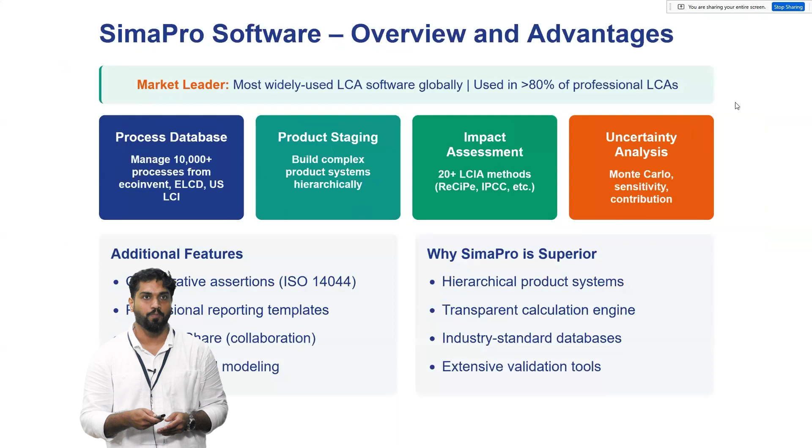You can use different other softwares also. Since we are talking about SimaPro here, these are some of the advantages you can see. Let's get started on how to do the life cycle assessment in SimaPro software, or any process.

The first thing you would have to do is to clearly sketch down or clearly define the different processes that are involved, or a flow diagram of the different processes. This is an example for life cycle assessment of a cycle.

In your project also, the first thing you might have done is to clearly write down or sketch down what are the different processes involved, divide that into different unit processes, and then add on different emissions associated to those, then the recycling process or waste disposal scenarios. This is how we start any LCA project.

Here this is an example of a cycle, life cycle assessment of a cycle, cycling for 1 lakh kilometer over a lifetime of 15 years. So this functional unit is very important in order to compare different systems. We need to make the functional unit similar.

For example, if you are talking about milk packaging, one is using carton and one is using bottle, you cannot make a comparison from different materials, but what we can do is make the functional unit comparable, like delivery of 1 liter of milk to consumers. Some of the other examples are transportation and water purification.

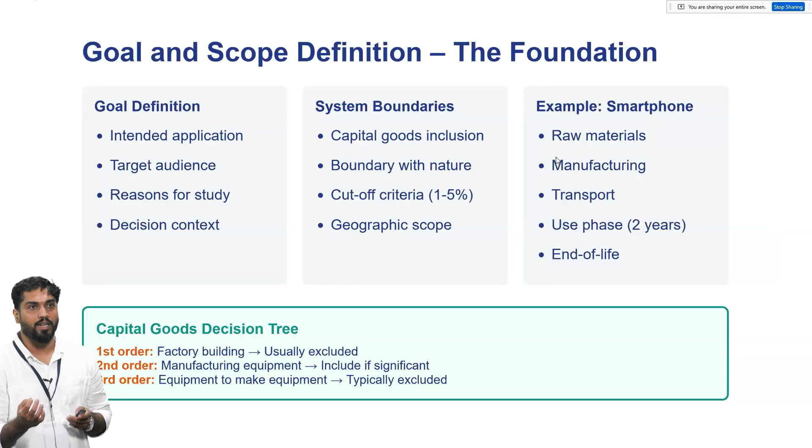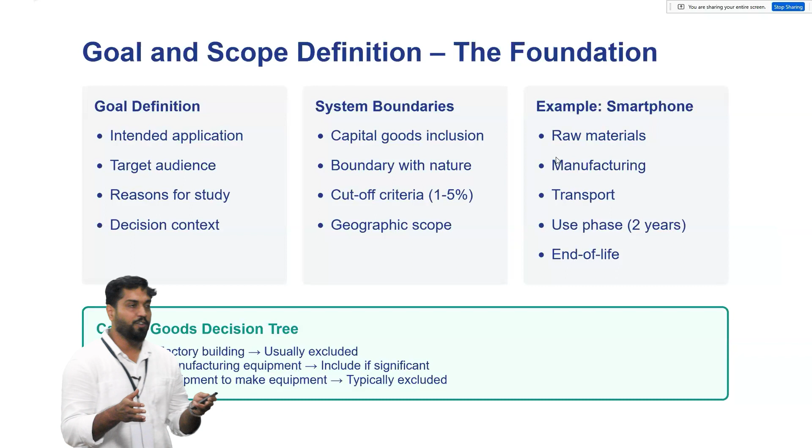These are how we should define our goal, system boundaries, etc. Goal definition should target the audience, intended application, the reasons. It should clearly define the reason why we are doing this process. And the system boundaries also, like whether we are including the capital goods or infrastructure associated to the processes. Here is an example, like for smartphone, what are the system boundaries that we have included: raw materials, manufacturing, transport, use phase, end of life.

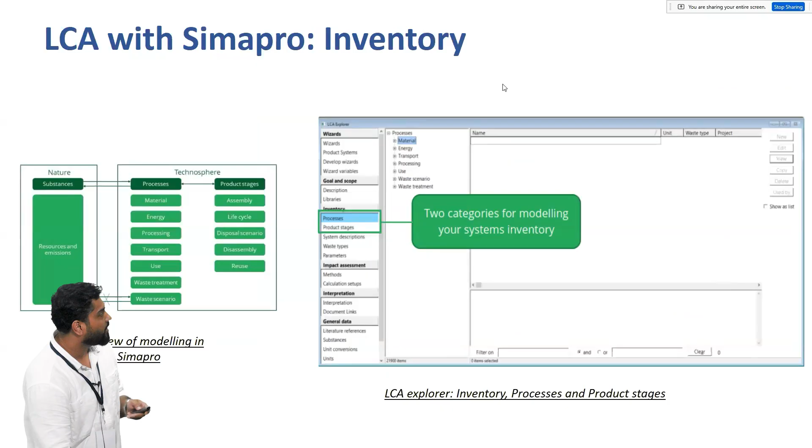This is an overview of the modeling that is used in SimaPro, like the resource and emissions from nature connected to the processes, material, energy, and different emissions associated to those in technosphere. Then in the product stage we have assembly, whole life cycle assessment, then disassembly, reuse, disposal scenarios. So this is the overview of modeling in SimaPro.

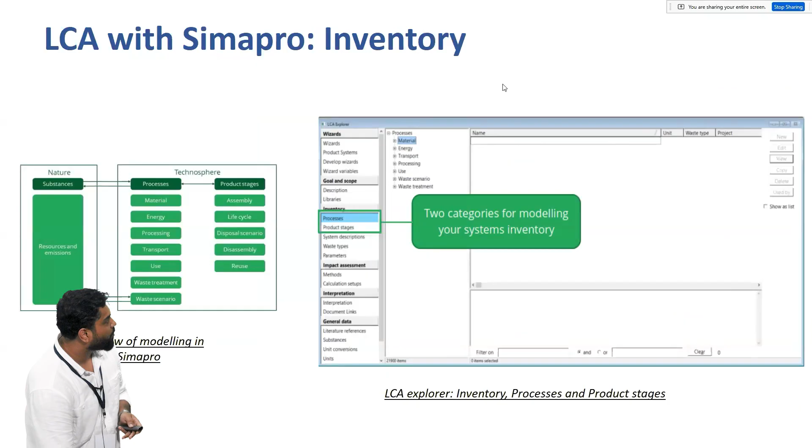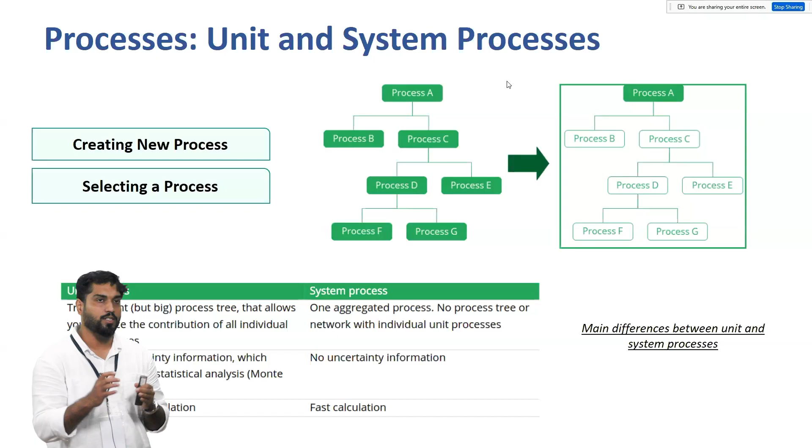Let's go to processes, unit and system processes. If you follow the database in SimaPro or any life cycle assessment software, you might have seen there are two different processes available: one is unit process and another is system process. The emissions associated to unit process are connected with the background data, while the emissions in the background data associated to system processes are provided in the same box. That is the major difference.

So when you select these processes in your project, it depends on your need and all, of course, but to make the inventory light, it is better to use the system process.

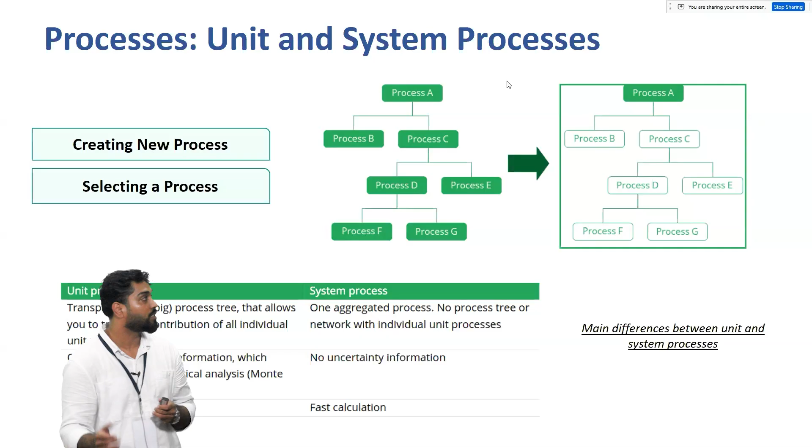Let's go to SimaPro and create one process here. In this presentation, my objective is to take you to SimaPro, the interfaces, what are the different functionalities available. We have been talking about the LCA process, then how exactly it is done in the software. So once you define all the goal definition, functional unit of the project that you intend to do, you can then start preparing different processes.

So when you come to the inventory, the first one will be processes, and as ma'am was mentioning in her previous presentation, many of these processes are already defined, because we have selected different libraries, and from previous studies or databases we have, like ecoinvent, these many processes are already defined. So if you go to any one of these processes, you can see, for example, aluminum alloy metal matrix composite and global market for aluminum alloy metal matrix composite system.

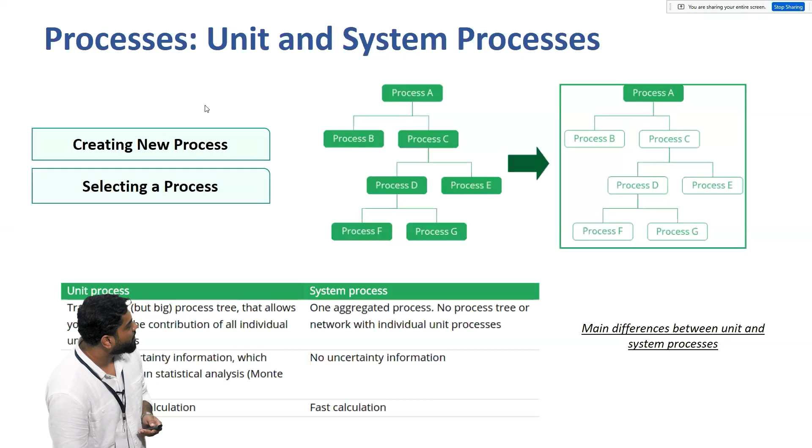Then there are two types of LCA analysis: one is consequential analysis and one is attributional. The difference is that consequential analysis is for different processes—for example, transportation is a process, so that's consequential analysis. Attributional analysis is for different products, for example the PET water bottle, etc.

For example, the water bottle, PET water bottle, etc. And another important thing to see is the allocation hierarchy.

Another important thing to see is the allocation hierarchy. Could you please repeat the difference? So consequential analysis is for different processes, and attributional LCA is for the products.

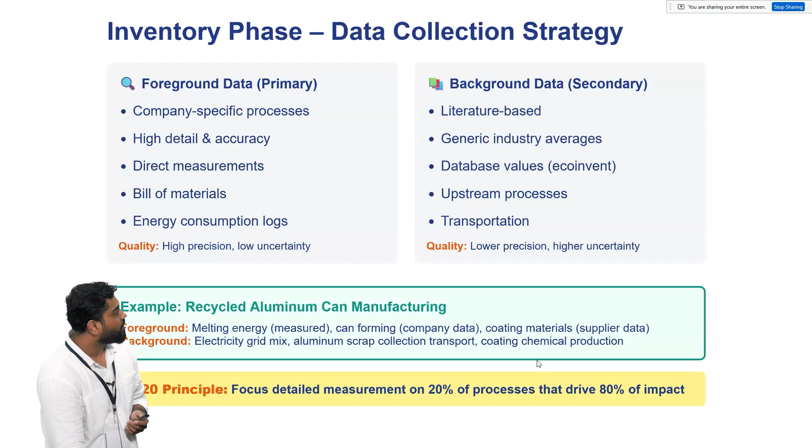The library that you just chose. Yeah, in the library there are different types. The aluminum thing that we chose, will that go in the background data, right? Because that is not our direct measurement. Which one, the previous one? This one? If you're not creating it, you said.

It depends on where you are collecting the data from. So if you are getting this data from a company itself, like in their EPD, that's foreground data. If you are picking it from literature or some library, then it becomes background data. This data may also be collected from a company, not necessarily from a library.

So once you create these processes, different processes you have created - for example, this is an example for comparing different materials used for a cycle frame. So you have created processes using different materials.

In SimaPro, for the cycle frame, now you can compare the environmental impacts associated with these different processes. There is a compare module available in SimaPro. So for example...

You can select this, and then here is the compare module. So these are the different processes that you have created newly in the SimaPro software. You can compare the environmental impact associated with these processes by clicking here, and here I have selected ReCiPe midpoint. I will come to the selection of the methods in a little while.

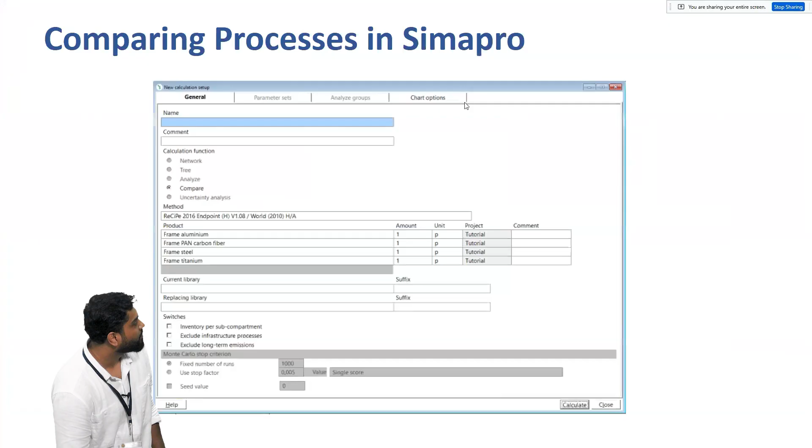So right now I selected this ReCiPe endpoint. These are different impact assessment methods that are available, and how do we make a choice of which impact assessment method should be used? Basically it is more about the deliverables, and the audience that we are delivering these impact assessments to.

For example, in a company, you will get this data - you plan for implementing an LCA study, you define all the scope definition and created the inventory, did the LCA analysis.

So if we are doing it for designers, then it should contain more eco indicators. Eco indicators are impact categories that are related to ecology, like eutrophication potential, land use, ozone depletion - those categories.

And if you are doing it for product managers, then it should contain more aggregated scores, like the impact categories. For example, it was discussed in the previous presentations that the impact categories have different units, so it cannot be compared among themselves, but it can be made comparable by dividing with normalization factors, or it can be compared to single score LCA results.

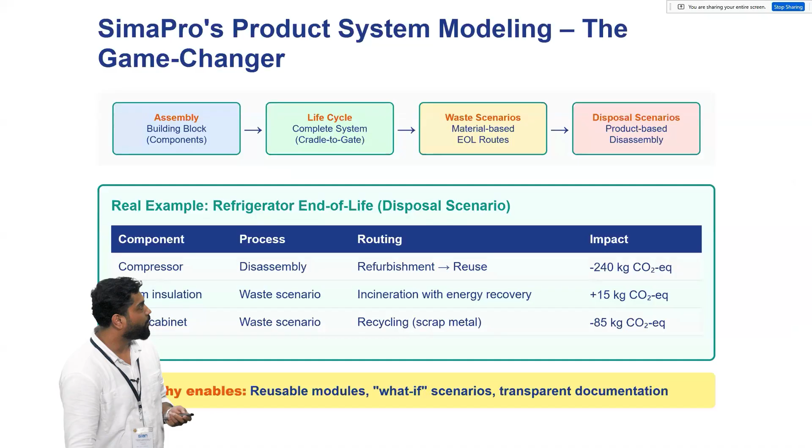So once you create different processes in SimaPro, you are also able to compare different processes based on different impact categories. Then there is one module called system assembly, which comes in the product stages. So here you can...

Assemble your different processes - for example, if you are making a cycle, as a bike assembly example, you can individually create the frame aluminum as different processes: saddle, handlebar, group set, pair of wheels, set of brakes, or for your bottle, it can contain packaging material, PET. So in the product assembly stage you can assemble all these products and then evaluate what are the environmental impacts associated with the whole product as a whole. That is the functionality there as the product assembly.

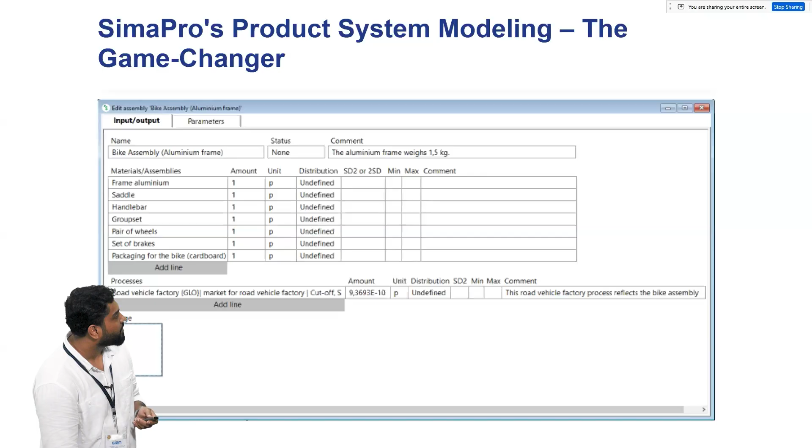I will just show where it is available - it comes in the product stages, in the assembly.

Once you click, here you can, for example for bike assembly, select different processes that you have already created. So when I am giving some examples, you can think about your own project and how it would be modeled in the SimaPro software.

So this is another functionality. Then in the life cycle, it will give the whole comprehensive life cycle assessment impact associated with those processes.

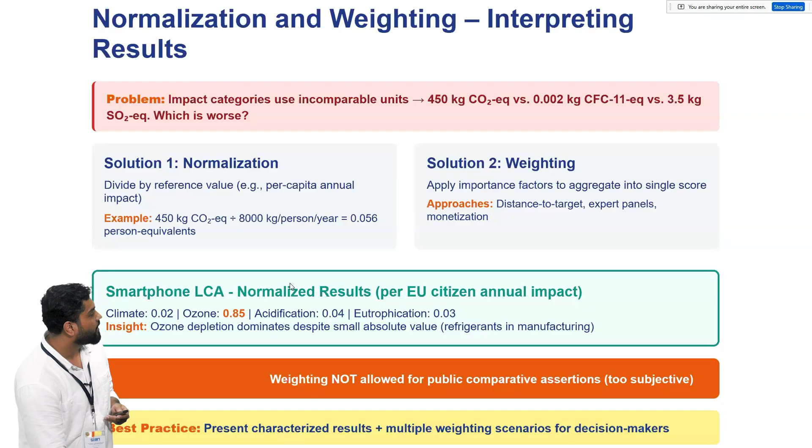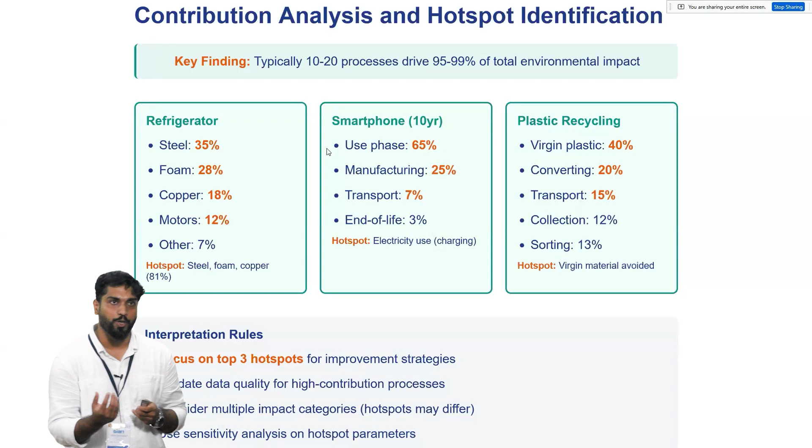Waste modeling, which I skipped - there are different waste scenarios also available in SimaPro software, where you can model how your products are disposed of, or end of life cycle assessments can also be modeled.

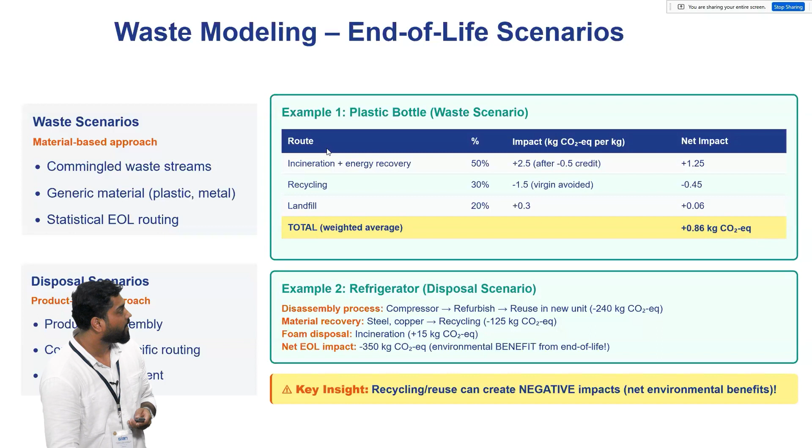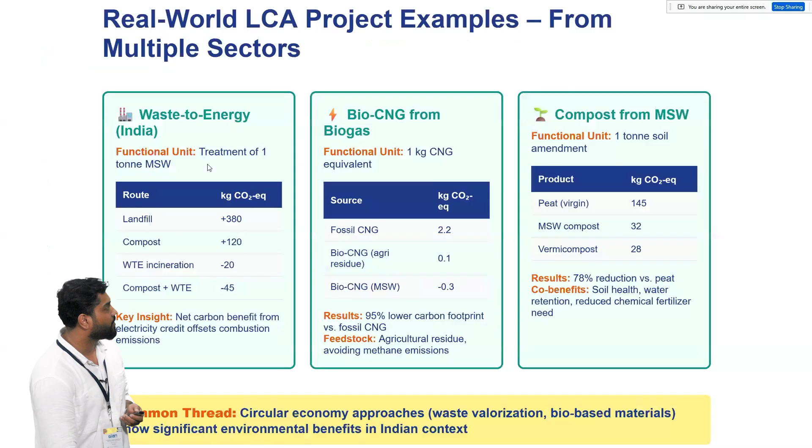These are some of the real world LCA projects. So I think we can go to Srinivas waste management. I think yesterday we visited one of the biogas plants, right? Srinivas waste management.

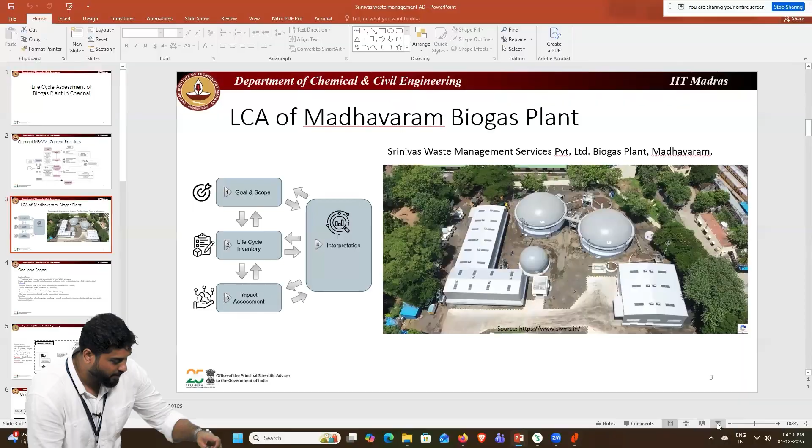I think it's better if I show you how I have divided the whole system into different unit processes. I think it's a little difficult to work with this mouse, please pardon. So this is where you can identify the Srinivas waste management system that we visited during our field trip.

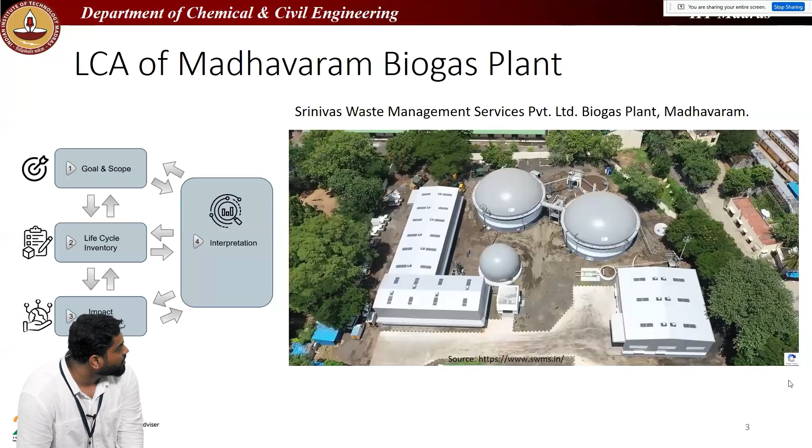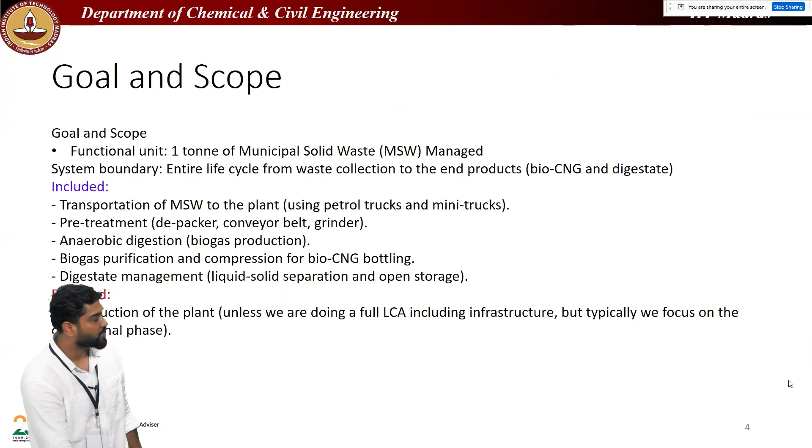This is the system boundary that we have followed, and the unit processes involved inside the boundary are: collection and transportation of waste to the treatment facility, then the second is substrate preparation. In the substrate preparation they have a depacker system, grinding, and conveyor belts are involved, and after substrate preparation it also includes pumping of the material into a sludge tank. Unit process 3 is the anaerobic digestion process itself.

The two different outputs we get out of the process are biogas and digestate. Unit process 4 is biogas upgradation. They are using membrane filtration, and for digestate management they are using a solid-liquid separator, and then the solids are converted into fertilizers - not in their facility, but sent to some other facility for composting and transforming that into compost.

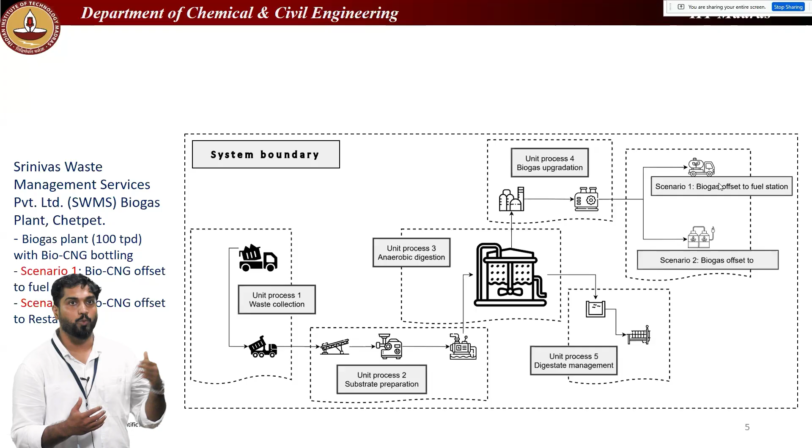And there are two different scenarios - for example, the biogas is offset to fuel stations. If you saw in the last part, the biogas was compressed, collected, purified, compressed and made into CNG cylinders, and some percentage of the compressed biogas was sent to fuel stations, and some percentage was sent to restaurants. So this is the system boundary.

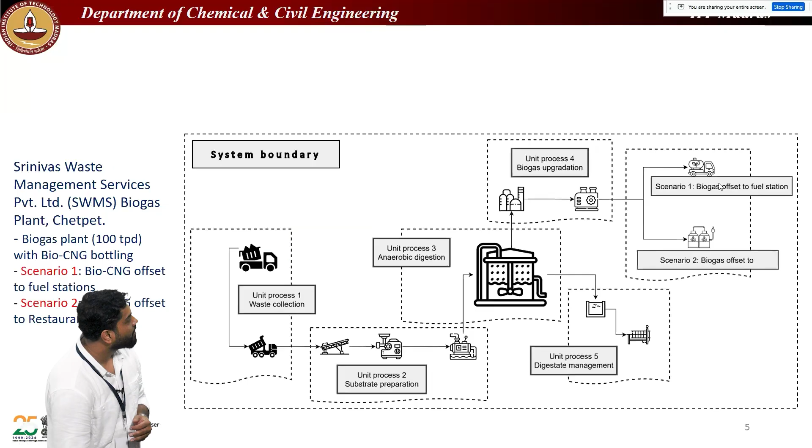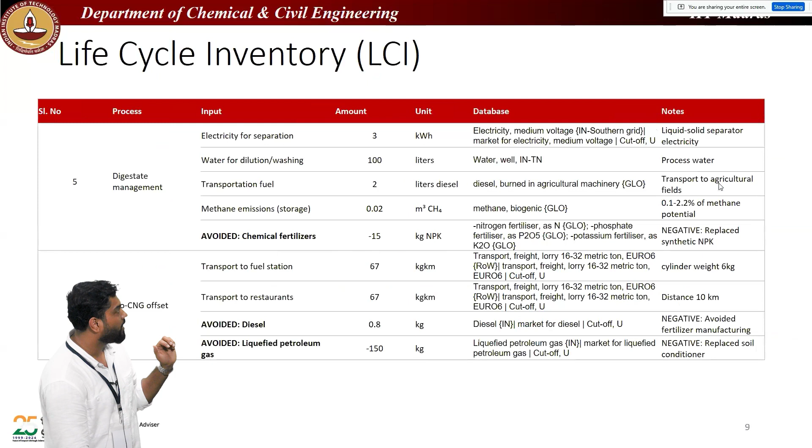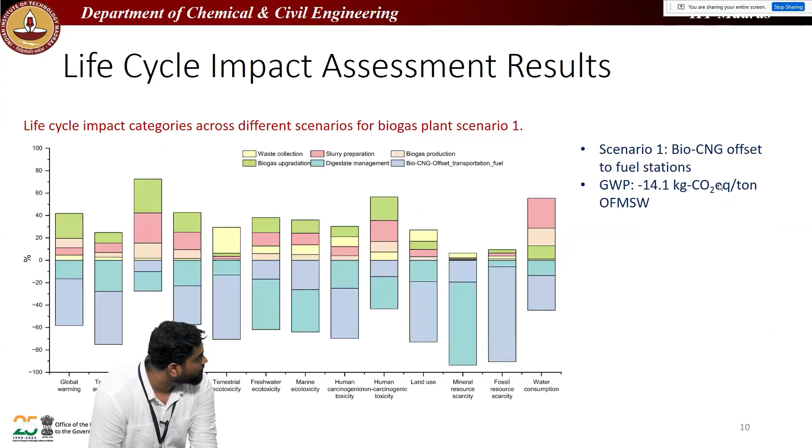So this is the inventory for the different processes, and this is the life cycle impact assessment that we got from those scenarios. So let's go to this process.

You can see here the first unit process was waste collection. So when we go to the waste collection, these are some of the materials in the inventory, like water, then transport of the material to the treatment facility, and maybe there will be methane emissions, like biogenic methane emissions.

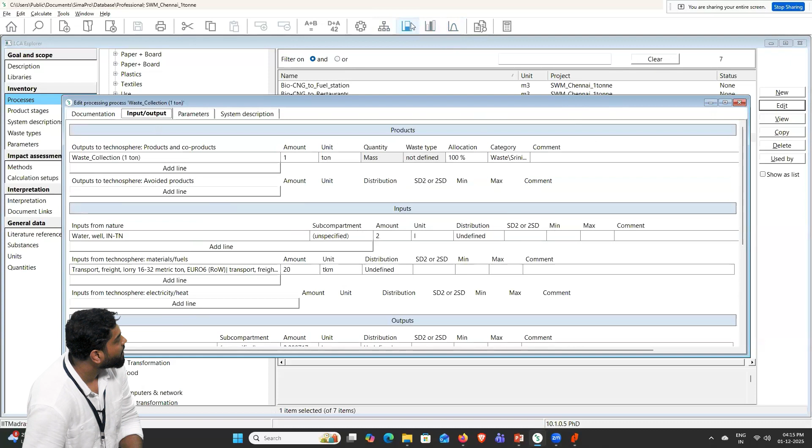So here, if you go to analyze, you will be able to find the different environmental impacts associated to that process. This is only showing process wise data. Let's go to... method I did not, okay.

So once you analyze, here you have to give the method. As you calculate, you will be able to see. Here you can even select what different impact categories you want. You can deselect if you are not concerned about, say, marine ecotoxicity, or based on your requirements you can select the different impact categories and find the impacts based on the different processes.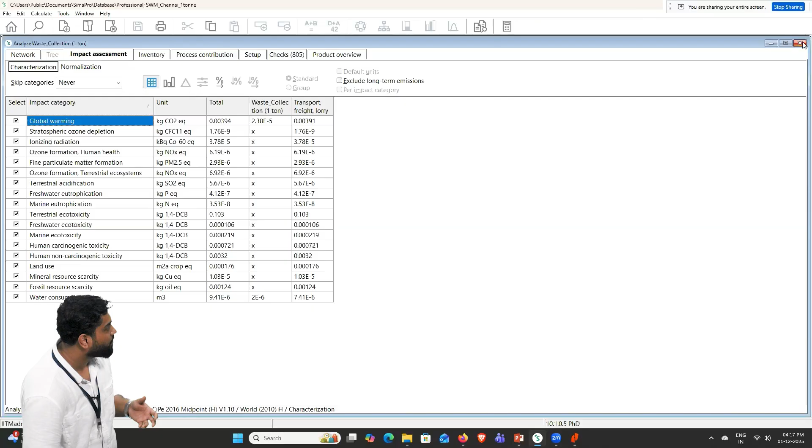So once we select all this in the product stage, this is the assembly for Chennai solid waste management anaerobic digestion scenario 1. Once we select, I have selected different processes like waste collection, slurry preparation, biogas production, upgradation, digestate management, bio-CNG to fuel station.

So if we want to analyze the impacts associated to this process, after creating the assembly line, you can go and calculate like this.

So here you can select whatever impact categories are required based on your requirements, and this is showing process wise the contribution to environmental impacts. Here the digestate management and bio-CNG to fuel station are giving negative impacts.

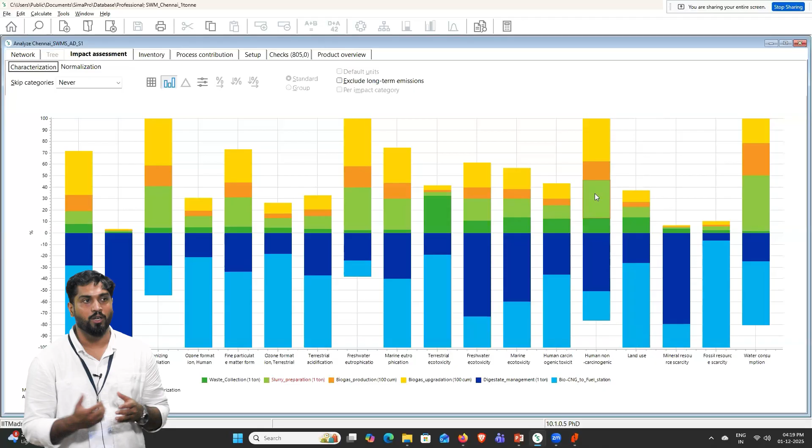For example, here you are using diesel for your transportation. What if you are using bio-CNG or electric vehicles? So all different types of scenarios can be created and easily analyzed.

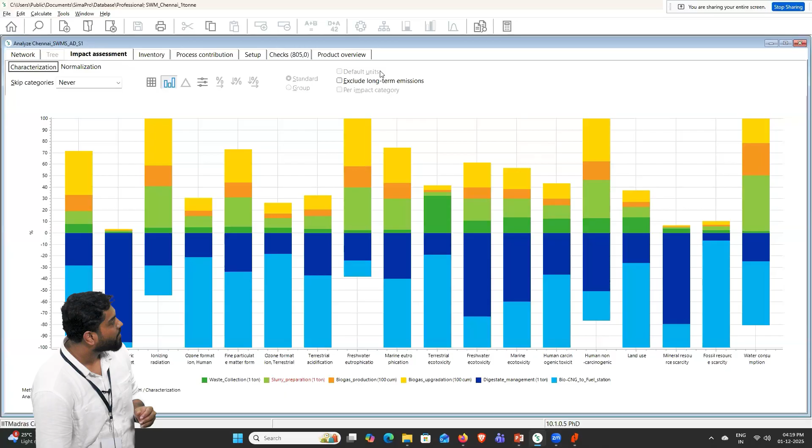So I think we will not go much into this uncertainty and sensitivity analysis, and we can have some questions. I can take some questions if you have, then we can wind up this session.

I don't know how many of you will be able to work with SimaPro, but if you go and do it in some other software also, the basic approach will be the same.

In the past few days we have been talking about life cycle thinking, so that will guide how you should collect your data, what should be the accuracy, which data set should be given more importance in terms of accuracy, how you create different processes, how you create the system flow diagram of the whole process, and what unit processes should be included or excluded, since some processes will be contributing very low GWP. So based on that we can make some cutoff, like 0.5%.

If that is below our cutoff, we may exclude those processes from our whole process. I think even if you are not going to do it in SimaPro, it will be helpful in your projects or the calculations you will be doing in this particular project.